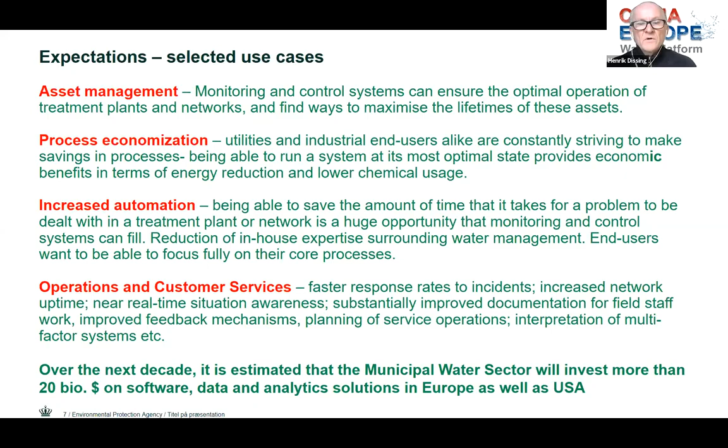Now, if you look at some of the expectations which relate to what I'll call the open universes, like the urban setting, the rural setting, and river basin management, there are several potentials related to improved management, integrated solutions, and so on, reducing pollution events.

But again, do we have the right organization? Do we have the right setup for actually making use of this? That's some of the things we, as authorities, should look into.

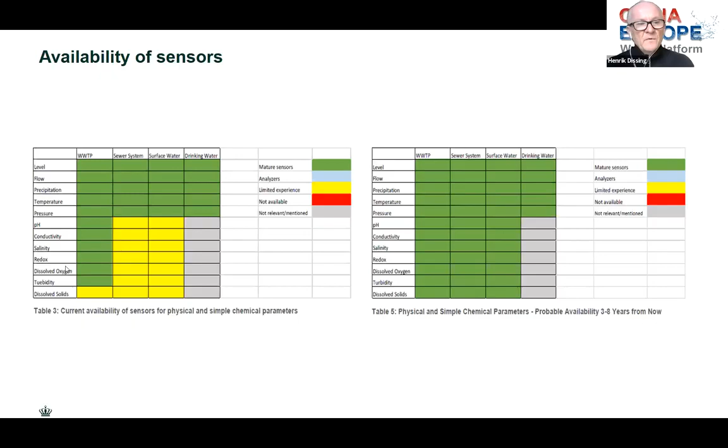Looking at availability of sensors, we made at the Danish EPA an analysis a couple of years ago, and what we could see was that we actually had mature sensors or other equipment ready for the quantitative water parameters, level, flow, etc. We also had some availability of equipment for real-time online monitoring for simple chemical parameters. But when we looked into advanced chemical parameters, only a few places had mature sensors, while in most places they were not available yet.

What we will see is that these will be available within the next 3 to 8 years. That means we are looking into a situation where utilities and authorities gradually will invest and be able to invest into parameters showcasing advanced parameters, and have to base the monitoring systems and planning on the assumption that these possibilities will gradually be available.

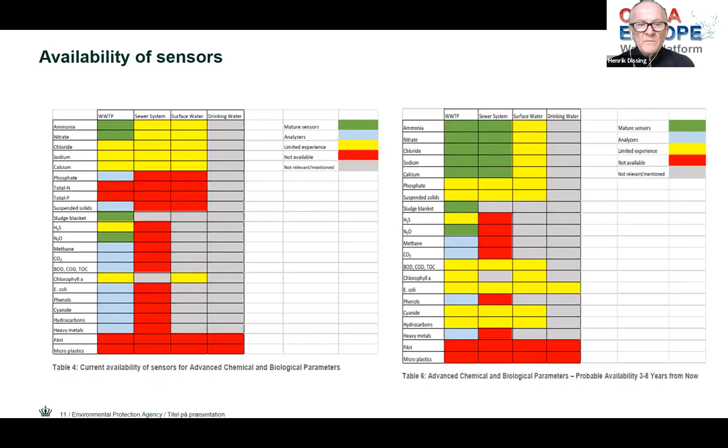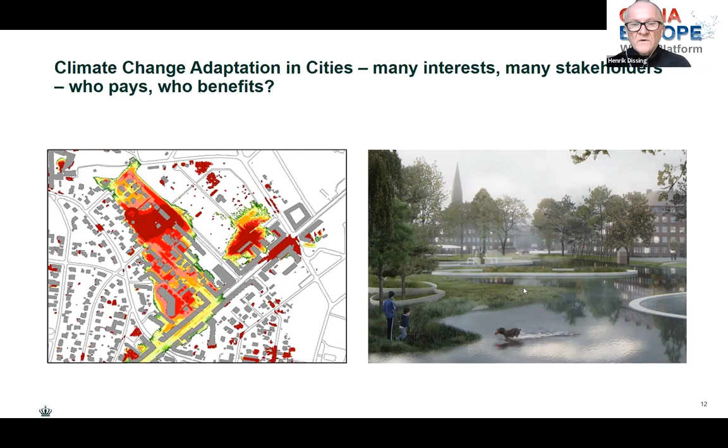Jumping to rural areas and the possibilities of using, for example, re-meandered rivers or wetlands as part of water quality improvement, you'll also see there are a lot of stakeholders, particularly the farming community and others, who will have to be part of the decision making. This aspect will be one of those we will pick up during the autumn when we will have a series of webinars dealing with rural water, including wetland restoration.

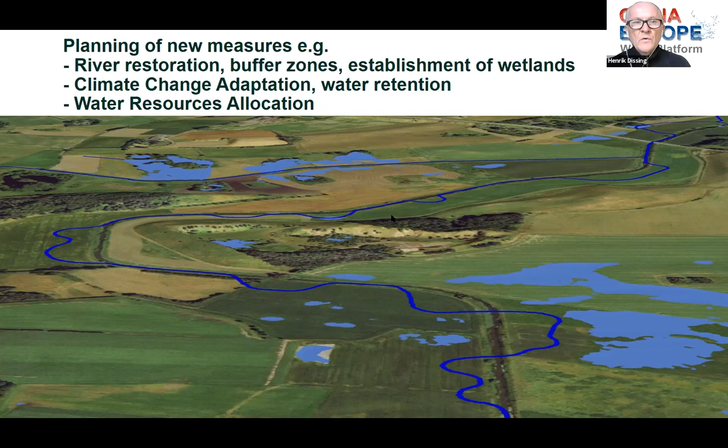Another example of complexity is groundwater management, where again you can see several stakeholder situations are part of this, and how do we find out who pays and who benefits.

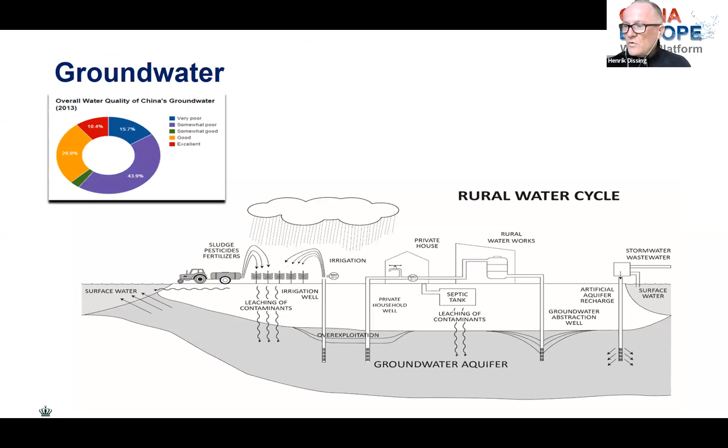We can only start guessing about how the situation will unfold when we talk about smart cities, which covers a lot of situations. Here, the cities will enter the scene and will have their opinions about data gathering, data organization, and accessing. The urban authorities might not have the same opinions as the water sector stakeholders about data organization. That will be very interesting to follow.

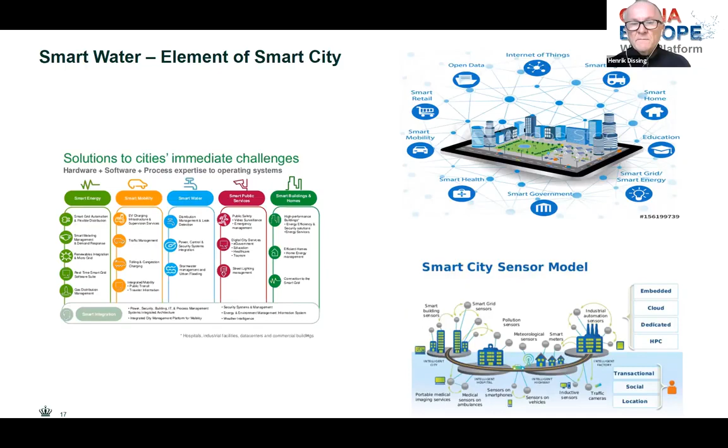I will now skip my presentation from here and only hope for all of you to be inspired to move towards strategic agility, covering the speed of change and also the complexity of our systems. I want to invite Professor Dragan Savic from KWR to take the floor and take us on with your reflections about the digital transformation.

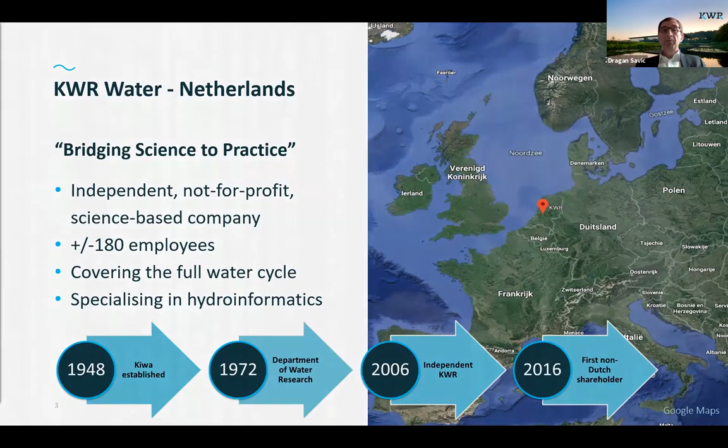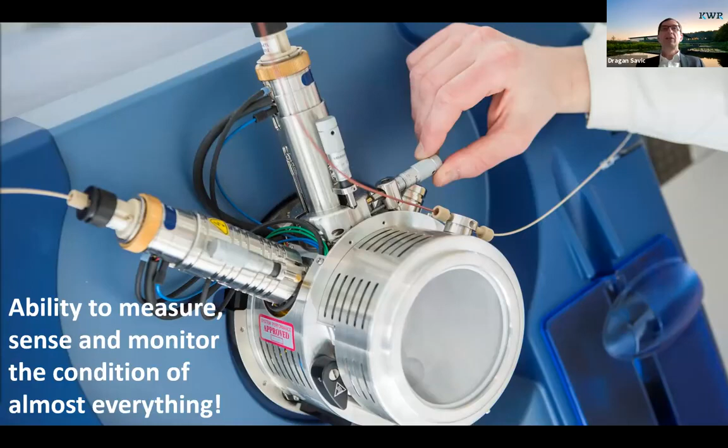What I'd like to emphasize here is that the quantity of information we collect these days as a world is unprecedented. 90% of the data in the world today has been created in the last 2 years alone. We also have the ability to measure, sense, and monitor the condition of almost everything. Again, Henrik showed that we don't still have some sensors, but most of the stuff we can do.

Connected devices and digital services transform many aspects of our world. Just think about transport and Uber, or tourism with Airbnb, or banking with banking apps, and education with MOOCs.

And I'm glad that Henrik mentioned silos, because this is how I see digital water, as an integrator across utility or different silos. Let's just go briefly through digital water technologies to remind ourselves of some of the achievements already, for example in artificial intelligence use.

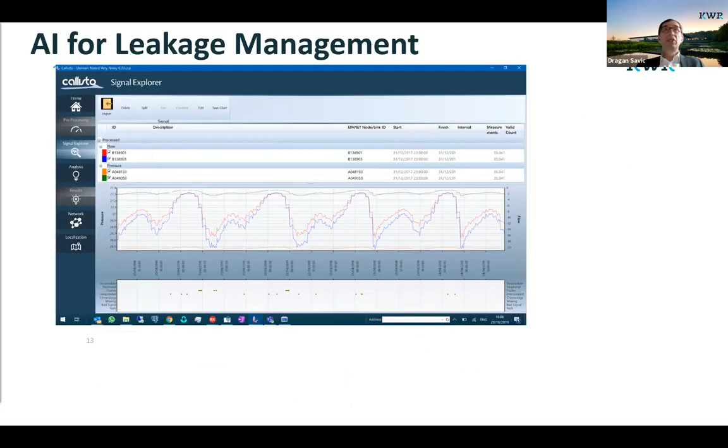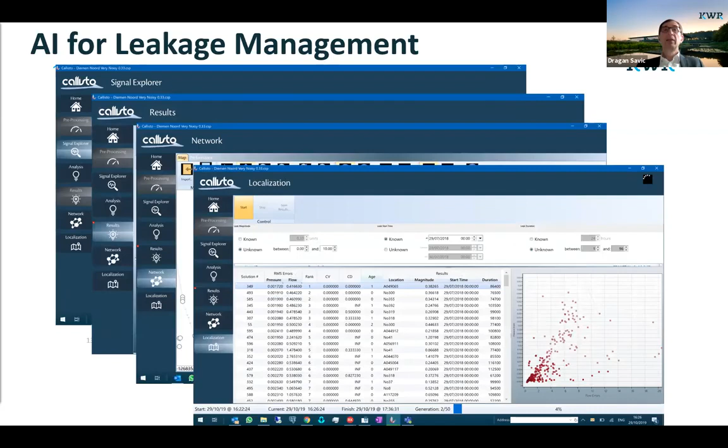Then we look into nature-inspired computing. These are physics and biology-based approaches and algorithms like genetic algorithms, cellular automata, neural networks, and fuzzy logic. You can see here an application in multi-objective optimization of district metering area design, and you can see 3 or even 4 dimensions on the graph on the right, where we can see cost, surplus, and reliability shown.

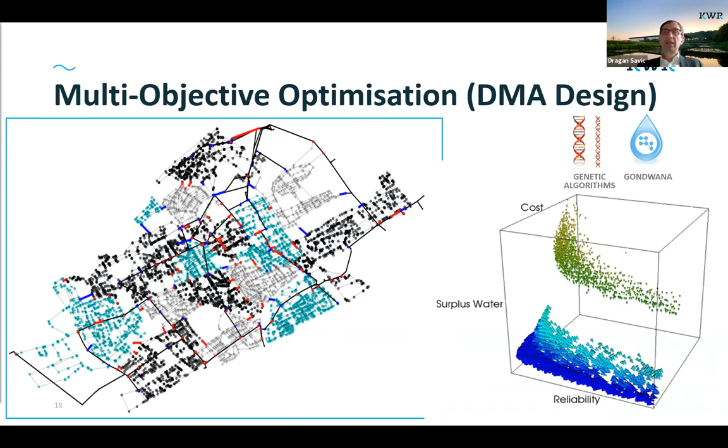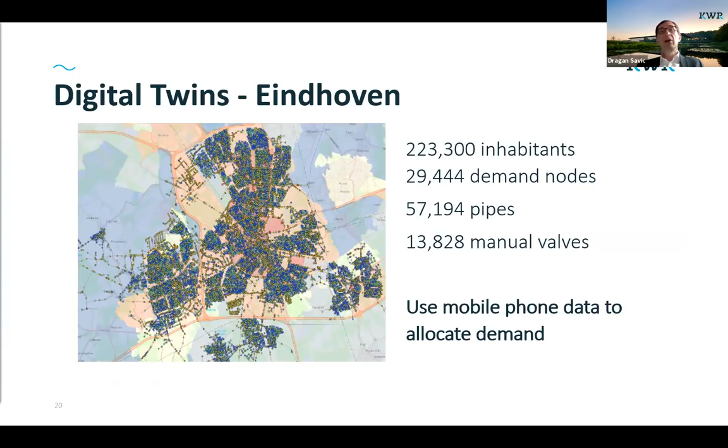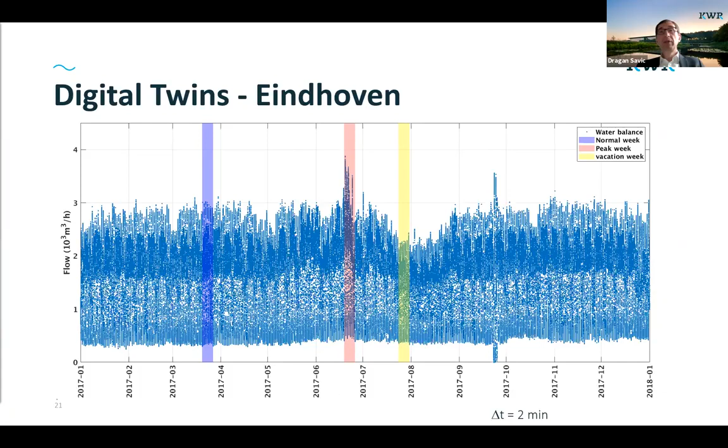And then digital twins, everybody is talking about them these days. This is an example from KWR, where we're looking into a digital twin of the city of Eindhoven's water network, with 220,000 inhabitants. We use mobile data to allocate demand, so the demand for water is where the people are at the moment. That can also be assessed through different means. This shows how a normal week, shown in blue, or an orange peak week with high demand, and a vacation week with low demand, look in this digital twin.

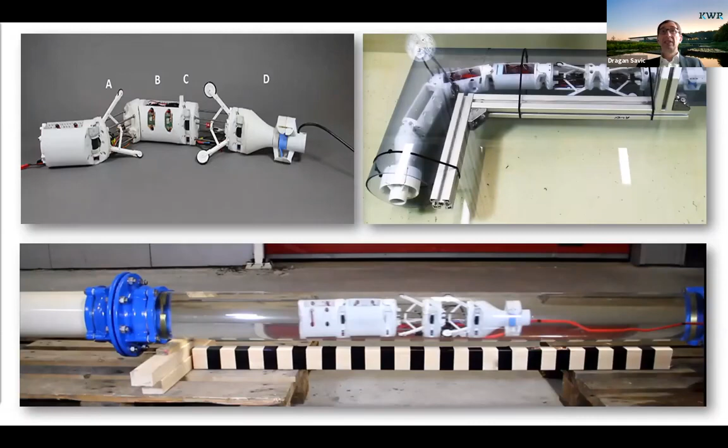Robotics is another area where there is quite a lot of usage of this technology in the water sector, or lots of interest in it. This is an example of a prototype inspection robot that can actually twist through all the corners. It's an autonomous robot; in this case it's tethered, connected with a link, but the latest one is completely autonomous. It can recharge, collect the data, and send the data without needing to be directly connected. Everything is done wirelessly.

So the point here is that digital water technologies are largely available. So what is missing? That would be a good question. In that case, I just want to remind you about what happened in the aviation and the car industry.

Aviation and car industries are interesting from the digital technology standpoint, as safety is of paramount importance, like in the water industry, but also because they have made the most significant strides towards full automation. You have Tesla self-driving cars, you have autopilots on every plane. So although enormous effort and investment have gone into those systems to be able to perform actions alone, most must still interact with humans who supervise their work, directing and overseeing their performance, or collaborate with them.

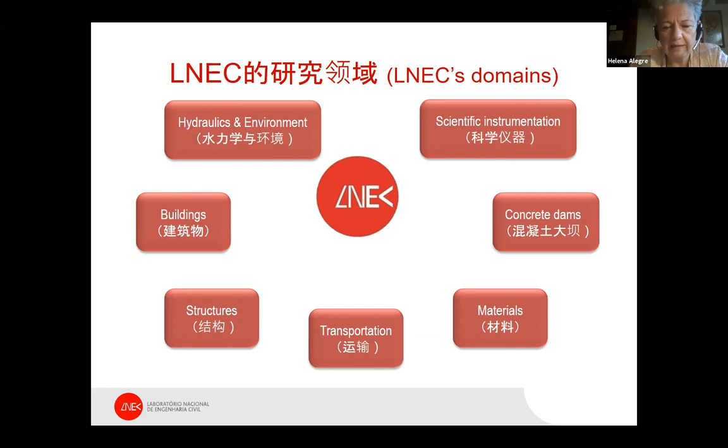In the hydraulics and environmental department, our activity covers the full water cycle, including natural waters—river, transitional and coastal waters—as well as urban waters. Urban waters are today's topic. We cover both water quantity, the hydraulics itself, but also quality, including ecological quality, and water uses by human activities, including structure interactions and system behavior of different types of systems.

Our hydraulics and environmental strategic lines include hydraulic structures themselves, environment and aquatic systems, risk management and safety, urban water, and information systems applied to water and environment at large. So today we're focusing on urban water.

To do that, we need to think of the main challenges, and digitalization needs to be put into context. When we talk about digital transition, we need to understand the key challenges we need to address. Digitalization is not an objective in itself, but a means to better achieve our objectives and respond to our main challenges.

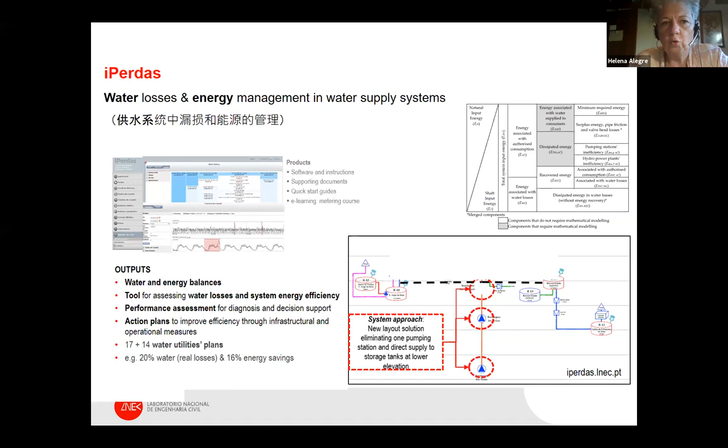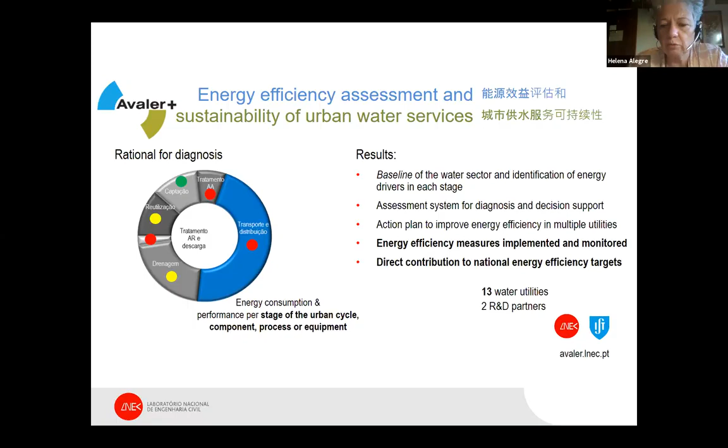We are also currently finalizing another collaborative project on energy efficiency assessment and sustainability of water services. The results provide a baseline for the water sector and identification of energy drivers at each stage. We have a systematic approach where we look together at water supply, wastewater, and stormwater for the main aspects in each sector, understanding simultaneously efficiency and effectiveness to better identify priorities and issues, and then compare possible improvement solutions.

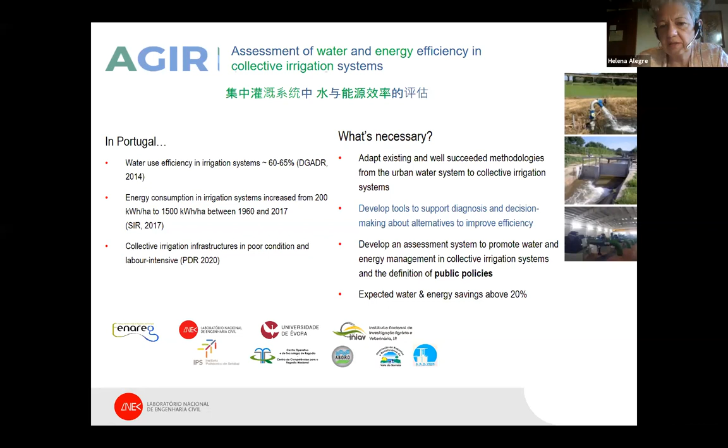We are also finishing another collaborative project in the field of irrigation systems. The issue of water losses and energy efficiency in agriculture and irrigation systems is an issue in Portugal, and from the information available, it's really an international issue. Again, we are developing a system approach where we address the nexus of water and energy with a good assessment, with performance indicators that allow for identifying and monitoring the effect of improvement solutions. This also supports the definition of public policies that can lead to better results. The expected water savings are above 20%.

Another of these projects has to do with energy, water quality and treatment. It's very much about both drinking water and wastewater treatment plants, but seen in the scope of the utility and the system as a whole. Again, not a silo approach, but a general approach where we work with benchmarking tools and infrastructure asset management. We produce tutorials to improve the energy efficiency of treatment plants, rethinking treatment from the asset management perspective, trying to enhance existing plants in order to make them adequate to current challenges and prepare them for the future.

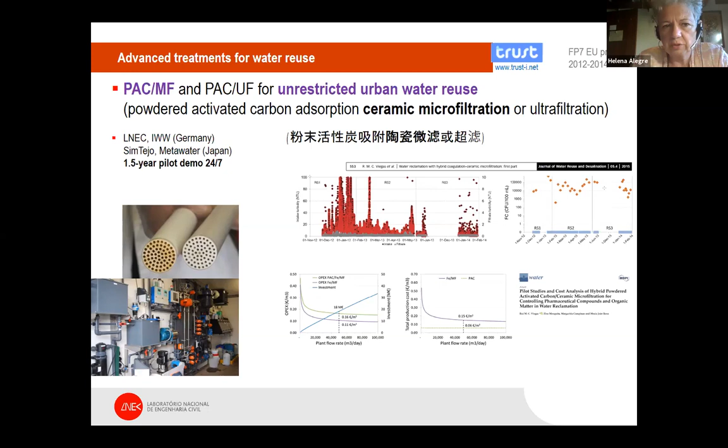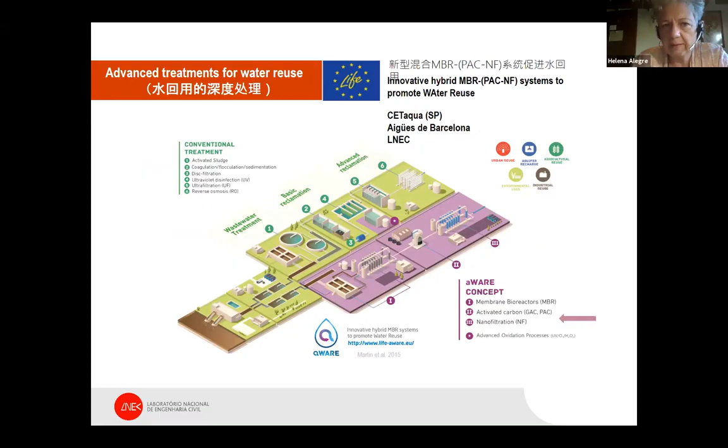We have also worked on advanced treatment systems, for instance membrane together with activated carbon. We have the links for the projects here, you can look at them. Also advanced treatments for water reuse, again in collaborative projects.

We see that, in fact, digital transition needs to serve these objectives. We need to have competent people. We need to create capacity building so that people really take the benefit from digital transition, not looking at digital transition as an objective in itself.

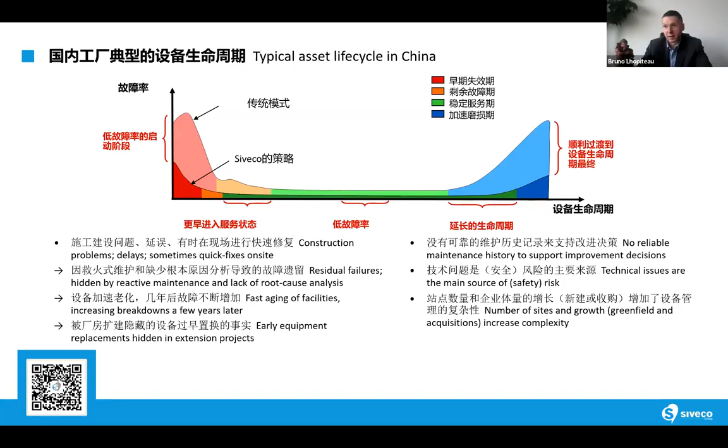I have two case studies. They happen to be sewage water companies, but we have actually worked a lot in freshwater supply as well, both on plants and network side. But I have two case studies of wastewater: one where we were involved on an existing facility to optimize existing assets, and the other one on a greenfield project where we were involved during the construction of the plant.

I will go quickly through this, try to highlight a few things, and again, you can get a copy of the slides later.

The first case study is the sewage water business of Jiangsu Sino-French Water, which is a joint venture between Sino-French Water, itself a joint venture of Suez, and Changshu Water, Changshu being a medium-sized city in China with 1 million people. You can read a little more here. It's a well-known company with a history of excellence in maintenance, asset management, and IT. They have their own IT company, and they supply IT systems to other companies as well.

They have done lots of very innovative, smart projects. However, in 2019, they realized they needed to improve service levels, safety management, regulatory compliance, and reliability, especially on the wastewater side of the business, and to contain the cost of operation and maintenance. And they realized their great IT systems could not really achieve this, could not really help. So they came to us at that point.

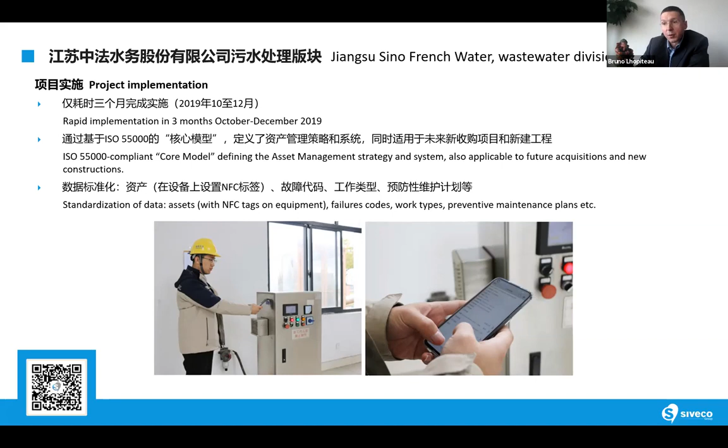focused purely on their needs. So we didn't try to have a system that does everything; we tried to focus on what was needed. That included standardizing asset data, which was not done before, and having operators and maintenance staff, the technicians, using the system. So we put the people in the loop of the system. We also put the top managers in the loop of the systems through this kind of display.

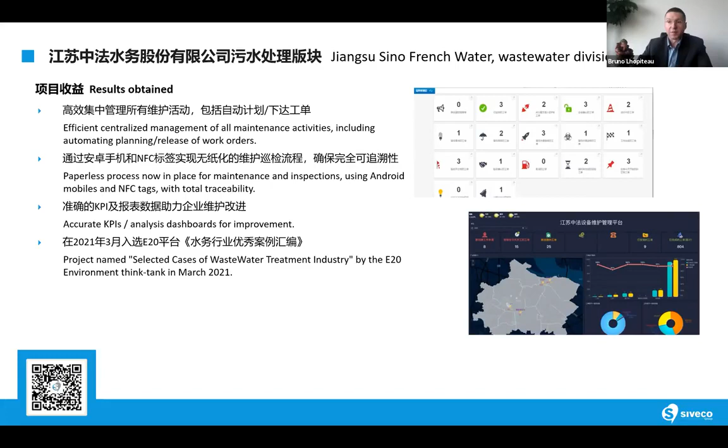Very successful project. They recently got an award from a water association, E20, that many of you in China know. It's totally paperless now, and this system was a base for continuous improvement based on the data in the system. So that was a good example for us.

The other one is a greenfield project in Hong Kong. I picked this one because the Hong Kong Drainage Services Department is also very famous as an operator-owner, and they have spent a lot of money on very big, very successful IT projects, but they still had operational needs mandated by the government in terms of life cycle management and using the ISO 55000 standard I mentioned before, to strengthen their operation and regulatory reporting.

Knowing that the Hong Kong market was sophisticated earlier than us in mainland China, but today they actually build very advanced facilities that they are not used to managing.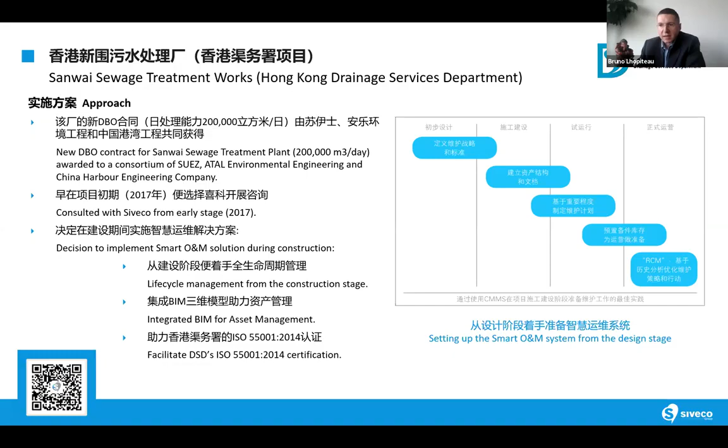We started a project with them from the early construction stage, from the late design stage you would say. And we designed together with them the IT system for asset management, again using the ISO 55000 standard as a framework. And the plant started operation recently, a few months ago.

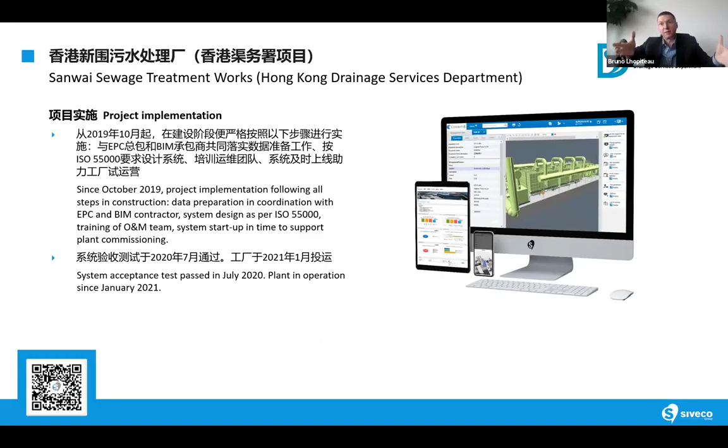So we followed the entire project from beginning to end. It's several years, so it's not as fast as the previous project, because here we had the time to follow the construction project. The system is up and running. So the benefit to them was to have an asset management system in place from startup stage, actually from commissioning, totally paperless, and the users are part of the system.

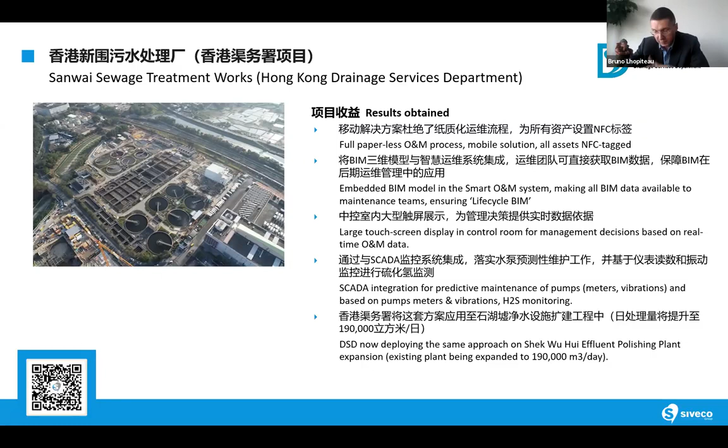Same as before, the technicians are using the system on mobile. The system is integrated with SCADA for predictive maintenance, and the system is also integrated with BIM models. They are now deploying it on another project in Hong Kong, so also a successful case.

So just to conclude, again, technology is available, all kinds of technology, and that's very good, including our own technology. It has to come into place altogether, and we found the ISO 55000 standard is actually very useful for that. And we, coming from an O&M or asset management background, we really activate this standard to deploy projects. That's what I describe here.

Common pitfalls for such IT projects are to be driven by IT and to be focused on systems. We believe projects should be focused on people, processes, improvement processes. And again, the ISO 55000 standard is a very good tool to help everyone in the project, including IT. IT is important, but including to help them focus on what matters for the asset management strategy and the asset management goals of the company.

The approach works very well. We have lots of clients, so I mentioned only two. This is the feedback we get from clients in our yearly customer satisfaction survey, but mostly it says that the approach helps deliver operational improvement.

So how about IT? There are still IT suppliers. You have Huawei doing big smart water projects. You have Alibaba, you have IBM, you have big consulting firms, you have local IT companies in China, lots of IT companies. You still have GIS suppliers. You have all kinds of companies getting into the hot smart water market.

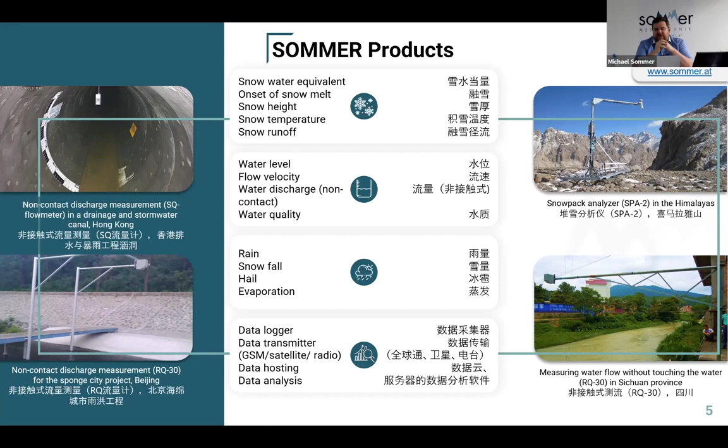But then we also measure the rivers. We measure water flows not only in rivers, but also in sewer systems, stormwater channels, drainage channels, well, all kinds of different water flow applications. And we also have other environmental sensors like rain, snowfall, hail, and evaporation. So we can deliver the whole package for flood monitoring.

Our main product that we deliver to China is actually non-contact radar flow meters. We measure the water flow of rivers, channels, and sewer systems without touching the water. That's especially interesting for flooding, as flooding causes unique problems with high sedimentation and a lot of debris in the water. You cannot put any sensors inside the water, so we developed a solution to measure water flows without touching it.

I want to emphasize that we deliver these sensors to over 110 countries in the world, so basically all over the world our systems are used. We're also certified by the Ministry of Water Resources from China and from different other countries.

A bit about the uniqueness of our product: we don't only measure the velocity and water level and leave it to the customer. We really calculate the hydraulic flow, the flow of the river, the flow of the channel, and this all happens in the sensor. So it's super easy to integrate into local data logging systems, SCADA systems, whatever. This is a big part of the accuracy, as many suppliers can deliver just the measurement part but don't have the experience and knowledge to calculate the real accurate flow.

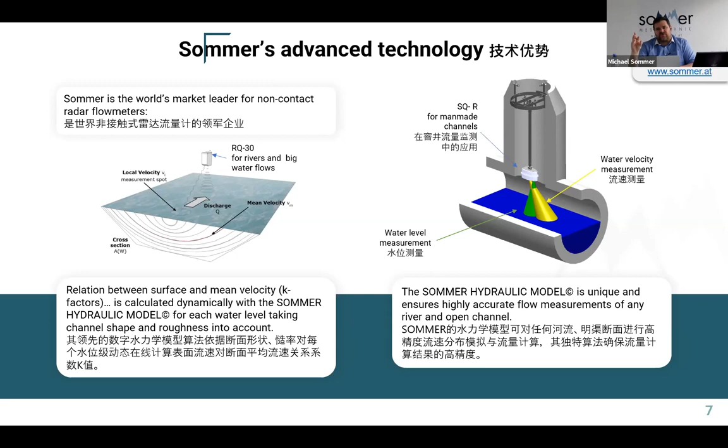We're also very active in China, and one of the projects we're working on is the Beijing Smart City / Sponge City project under the Ministry of Water Resources. The Sponge City project has a couple of targets: one is stormwater and flood protection, measuring the floods and also quantifying high water events.

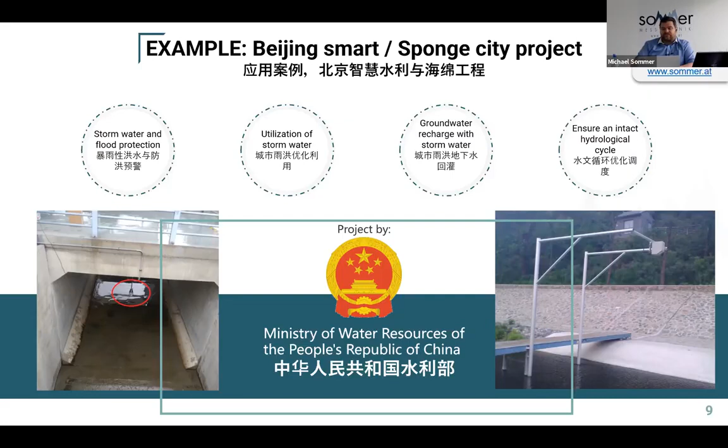The non-contact sensors, as we manufacture them, are perfect for this application. As I said, measuring floods or stormwater is very challenging in many cases, and therefore the non-contact measurement is very interesting. We're not affected by solids, waste, or debris. That happens a lot in stormwater - sometimes there's a tree, sometimes other kinds of waste in the water.

Also, the measurement system is not affected if there's just low flow. As we can see in many of these pictures, they're taken in normal water situations, and the accuracy does not change if there's stormwater. So you will get reliable and high accuracy data all around the year.

Also, as I briefly mentioned, we work exclusively with local integrators in China. That means we sell the sensors, and local companies build the infrastructure - they build the data logging system and send the data to their customers and stakeholders. The local companies also do all the maintenance, and we provide the training. We sometimes provide site inspections and go with them into details to help them implement everything.

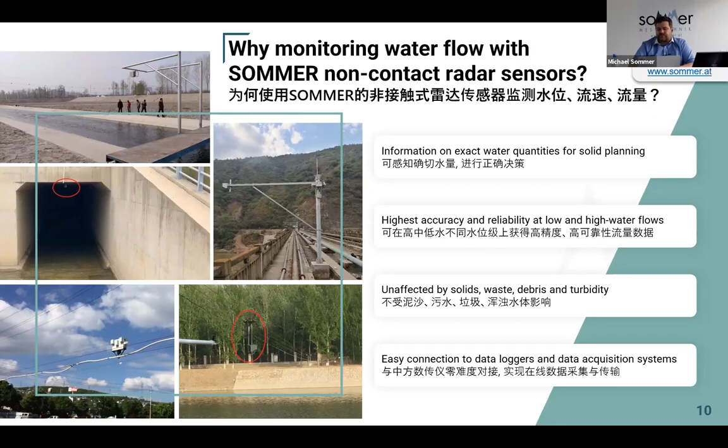So this was a brief overview about Sommer Messtechnik and what we do, emphasizing flood measurement. I don't know if the video stream comes through very fluently, but we have the video also online.

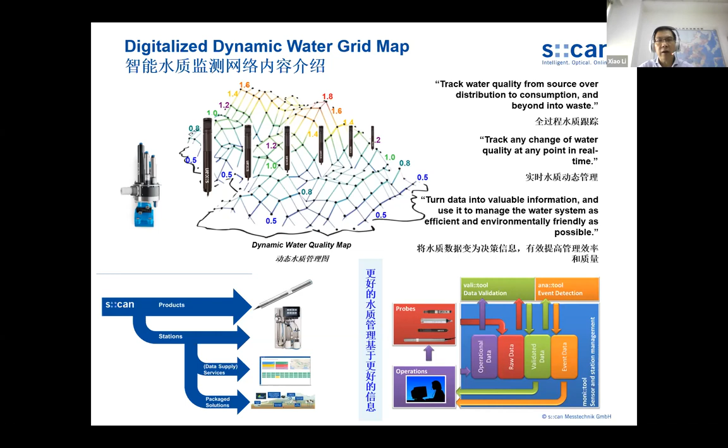We also have a tool we call ANA, an event detection tool. Even if something's wrong, we send an alarm immediately to our end users, to the smart water management platform, so they can get it immediately and make the right decision based on this information. That's the whole software program based on our station.

Here is an example of how we do this with our smart software, where we can detect and respond to any kind of event in real time and immediately see the response of the water system, taking action on the water quality map.

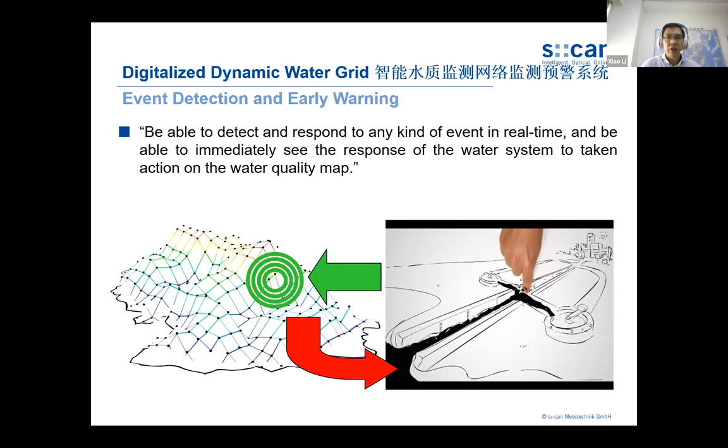This is what our systems, sensors, terminals, and systems look like. The advantage to meet the requirements of the smart water platform is that it is accurate, reliable, quick, and uses no reagent. This is very important. Also low maintenance, no spare parts, easy to install and operate, high normal operation rate, and inexpensive measuring instruments for comprehensive and time-resolved water quality monitoring. Our sensor is simple to use and reliable.

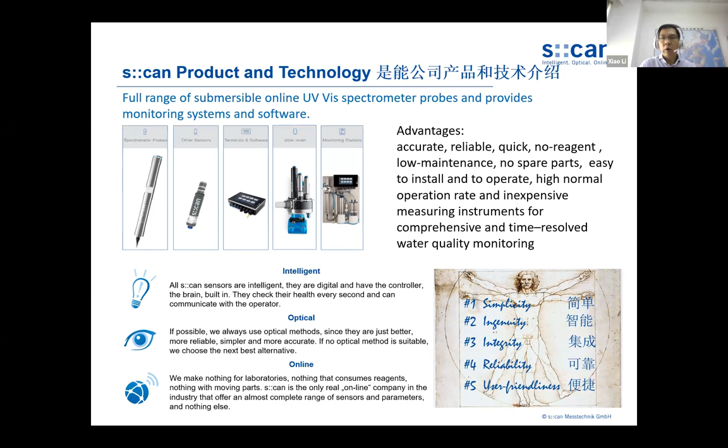Here's an example for drinking water, for city drinking water networks, showing what kinds of parameters we can technically deliver, what is needed, and what is cost-efficient for the variables we monitor.

For drinking water pipes, we have different parameters: UV spectrum, DOC, TOC, chlorine, turbidity, color, ORP, conductivity, and other important things. But we have to determine which parameter is most sensitive for event detection, is reliable, has low maintenance, and is cost-efficient. We have to consider all of this.

We can see that the UV spectrum is the most important one, with high sensitivity, reliability, and low maintenance. Our system, which we call PipeScan, can offer all these important parameters for drinking water works monitoring.

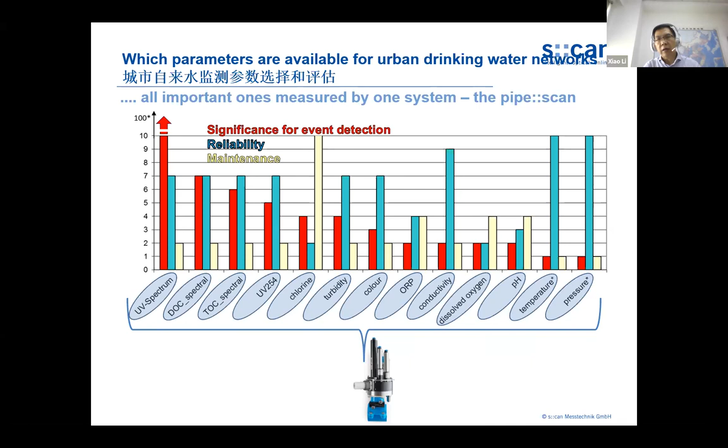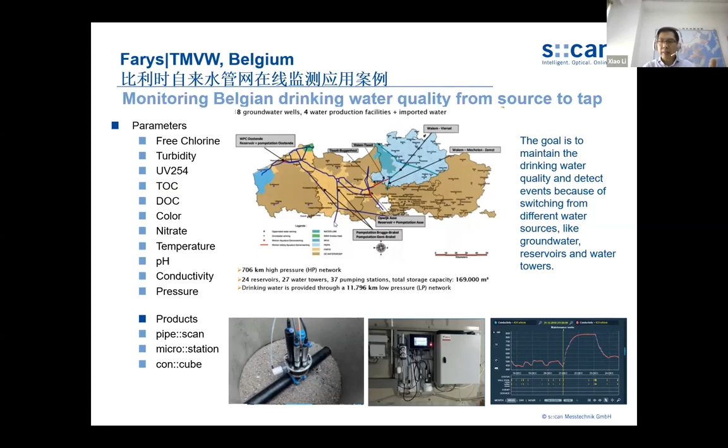So just very quickly, two cases. One is in Belgium, drinking water monitoring. This is very important for measuring source water from different kinds of sources, groundwater, reservoirs, and also water towers, to use different source water to monitor different water sources and keep the drinking water quality. That's why they are going to use these small devices.

Here are a few pictures from China showing what we have done in the past for city monitoring: sewage monitoring, city channel monitoring, building monitoring in big buildings and shopping malls, municipal wastewater and drinking water, and reliable portable monitoring stations that we can use for emergencies. This is a summary of all our applications.

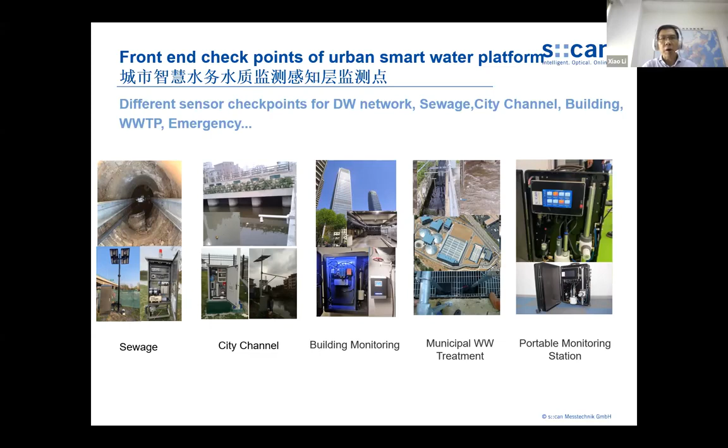So the short version: I just want to highlight our contribution, our solutions using digital monitoring sensors. They are able to get real-time data - that's one thing. Easy to use, easy to install, and easy to analyze - that's the second one. And economically affordable for everyone, for end users and local government companies.

Using these optical sensors, we can avoid what we call second pollution, meaning the reagent going into the water and polluting it a second time. This is environmentally friendly, saves costs, and raises efficiency of water treatment for water treatment companies in their process control using digital monitoring sensors.

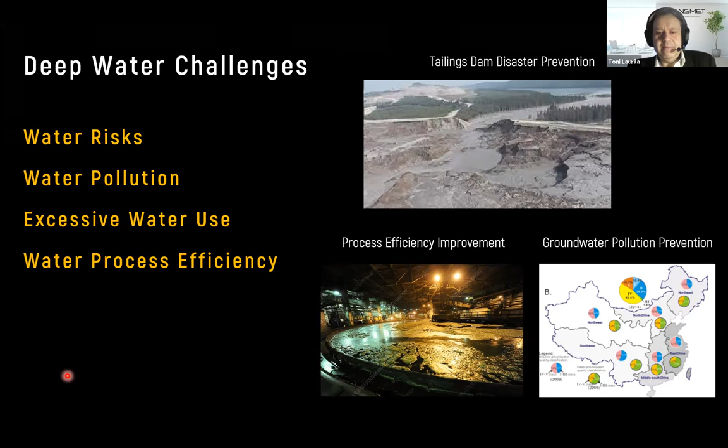Sensmet, our company in brief: we are a 3-year-old startup company, now 9 professionals, with 10 years of research and development behind our new technology. What we typically offer our customers is 7,000 data points per analyzer per month, and each data point can contain several water quality parameters, up to 50 parameters in one measurement.

Our product is a comprehensive water quality analyzer that typically sends data either to a cloud or a customer's distributed control system, the DCS system. From there, the end user can see the water quality data in real time using a graphical dashboard.

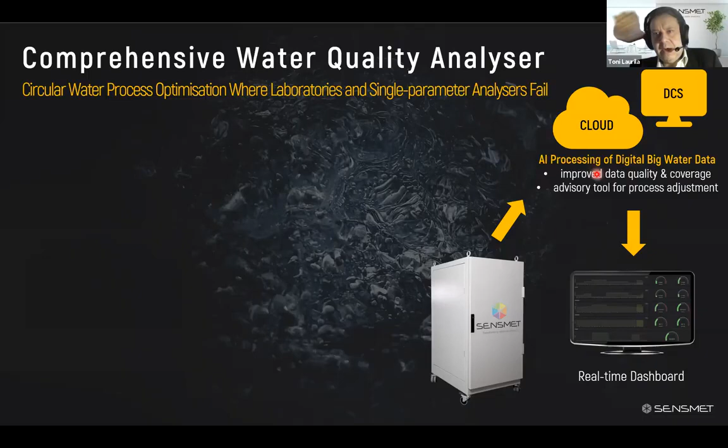Then either in the analyzer or on the cloud, we can do a lot of data processing using the latest AI tools on the digital big water data that we produce. With that post-processing of the data, we can either improve the data quality and increase the coverage of species to be monitored, or we can even provide advisory tools for the customer on how to adjust and optimize the process.

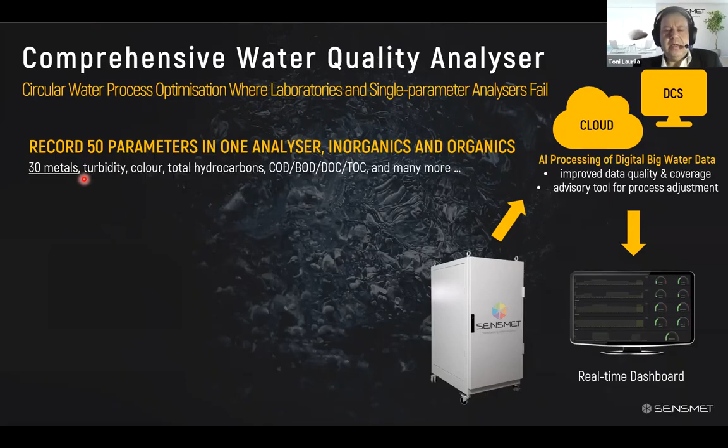With the Sensmet solution, we can measure up to 50 parameters in one analyzer, including both inorganic metals and organic species. The metals coverage of 30 different metals is our unique advantage. In addition, we can cover turbidity, color, total hydrocarbons, wastewater parameters, and many more.

It's fully automated and robust. There's no need for human operators. The results are reliable. We use certified reference chemicals to guarantee the accuracy of our measurements, and all the measurements are quantitative if needed.

Our measurements are typically also optical, so there's no need for chemical reagents for analysis. Our current maintenance interval is 3 months, so nobody needs to touch the analyzer for one quarter.

As I said, the results are quantitative and we are sensitive. The typical limit of detection for metals is 0.1 milligrams per liter, and from there we can go up to grams per liter level in some mining applications.

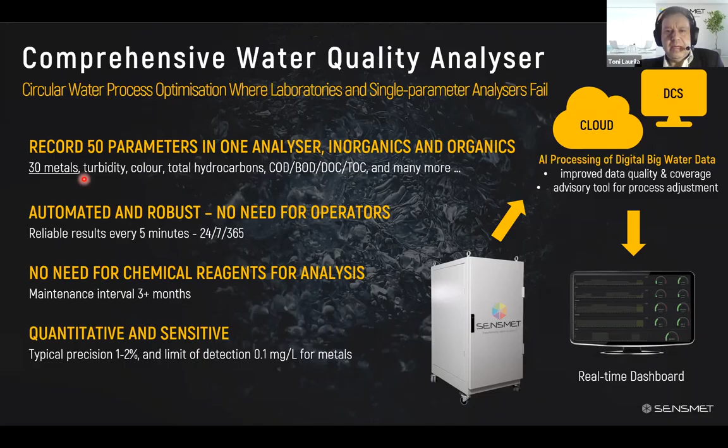We are doing a lot of work to really bring real-time water analysis to the field. Of course, at the core is the analyzer technology, but we increasingly see the rule of thumb that 80% of the issues in the field are due to the sampling. So it's really important to pay attention to how the sampling is realized and to ensure that it's representative.

For that, we have intelligent pre-treatment units that monitor the flow and pressure of the sampling lines and do automatic cleaning, either using cleaning agent solutions or pressurized air purging. So we put a lot of effort into making the whole measurement chain reliable.

With that, I would like to thank you for your attention, and let's transform the future of water management together.

Thank you, Toni, for this very precise, to the point presentation. We are a bit over time, and we were supposed to have a round table here where I would ask some questions and so on, but we will skip that part.

I will invite the speakers instead, each to very quickly take us through what has been their main takeaway today from the presentations and their reflections along the road, and eventually maybe also some suggestions for our upcoming event at IFAT Shanghai, where we will have a continued discussion about digitalization. So what topics would you particularly take? I'll invite all of the speakers to come forward, and I'll do it according to how I see people appearing on my screen. So Toni, first, what will be your main takeaway from today?